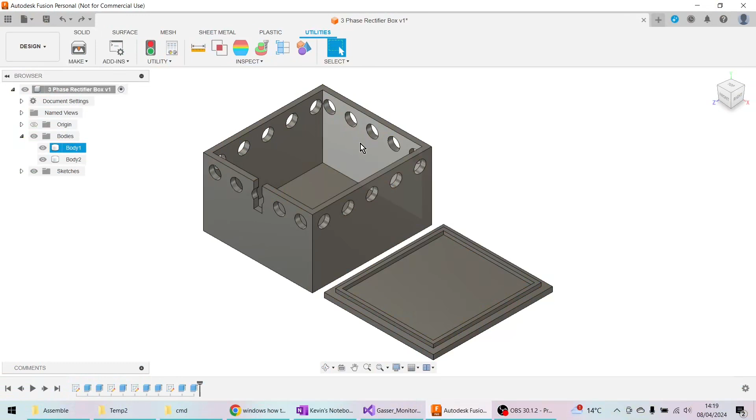Okay, so we start with these two bodies here. They're two separate bodies - we've got the main body and the lid for the box.

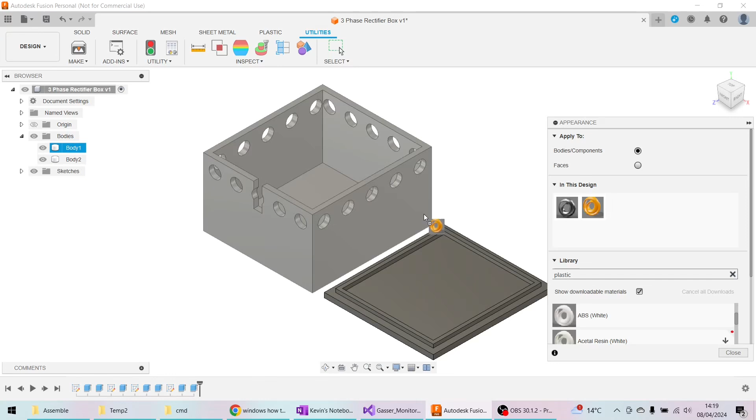So what we need to do is, first of all, let's just colour them in orange for a learning curve. I'm going to press A for appearance and search for orange, my favourite colour. We haven't got an orange, so we're going to go plastic. Now I'm just going to choose white, and then double click this and turn it into a nice burnt orange like this. Done. And I can drag that to that and drag that to that. So that's a nice looking orange.

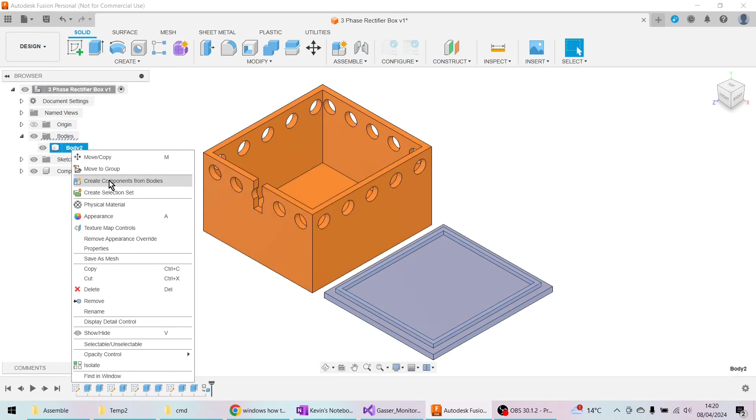I like that. So let's now assemble this to this. I'm going to go back to solids up here and go assemble - no, I'm not, I've got the two bodies. I need to do this bit first. Body 1, create components from bodies. Body 2, exactly the same. Right click, create components from bodies. And now I've got two components.

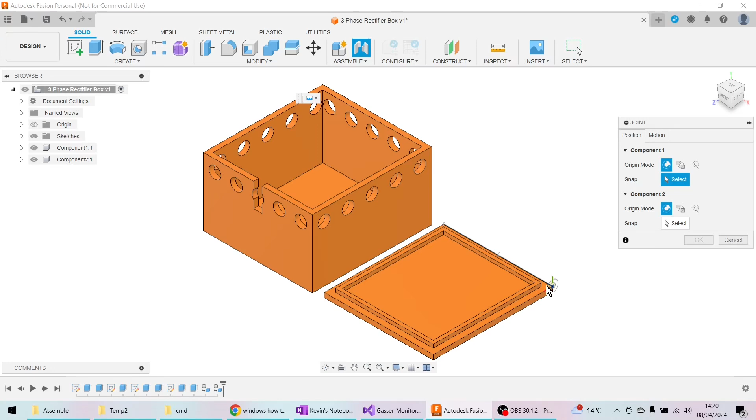Components can be assembled like this, so I can click on this assemble joint. We can make a rigid joint - there are several different types but we're going to do a rigid. And I'm going to select the part I want to move to the other part. So I want to put this one on top of that one, and I figure that if I pick up this corner here and drop it on top of that corner there, then that will be good.

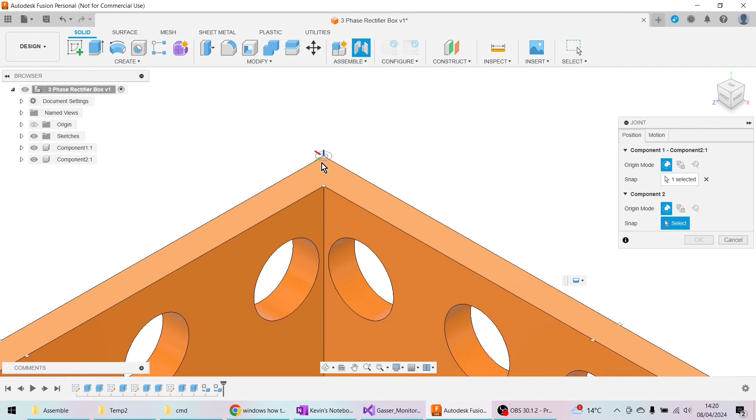So we're going to zoom in and I'm going to make sure I get the corner. Look how this bit's highlighting here - I'm on that edge, not this edge or there, I'm on that edge there. Pick that up, and I want it to go to this edge here. Now, slightly misaligned, so I'm going to rotate this around 180 degrees. And we're on. Click OK.

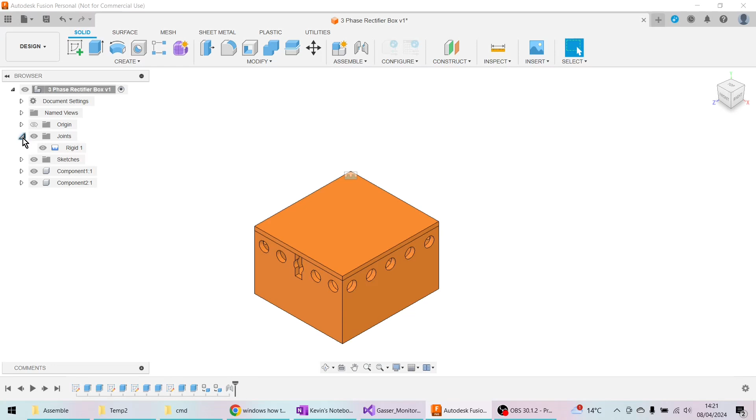We've now got a joints up here, and I can turn this off if I don't want to see my joints, or turn all of them off with the master hierarchy. Okay, so what I now need to do is see if that lip inside there has got enough clearance for 3D printing.

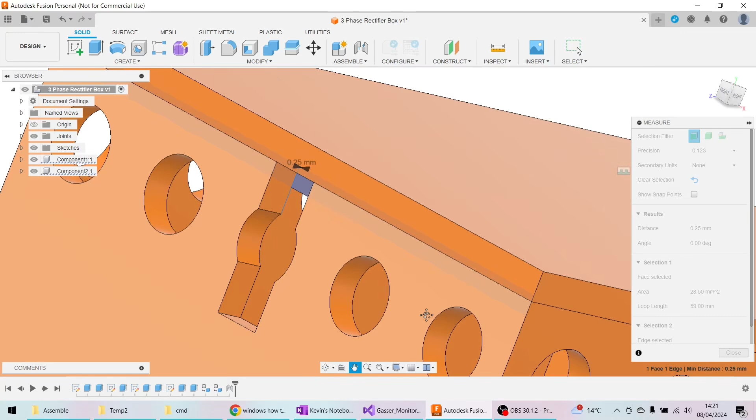So luckily in this case I've got a nice gap here, so I could go inspect, highlight this area and that line there, and I can see I've got a nice 0.25mm gap in there. But if I didn't have that, it could be an issue.

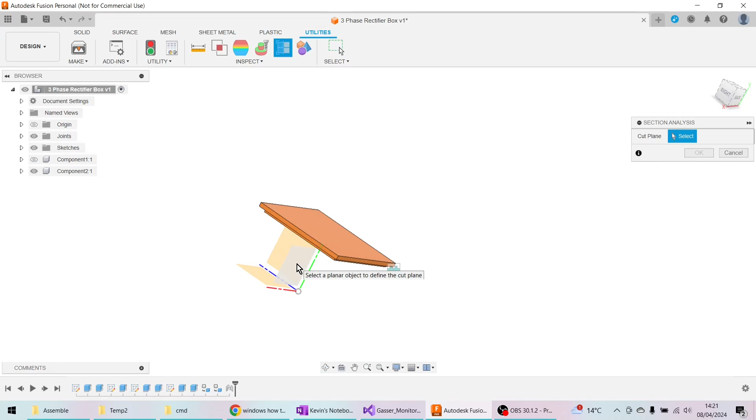So what I would do is go to utilities, inspection, section analysis, and I need to click that orientation. So if I just turn that component off so I can get to it, I want to see this into orientation like that. Click OK, put that component back on. I can now zoom in and have a good look at what that gap is there.

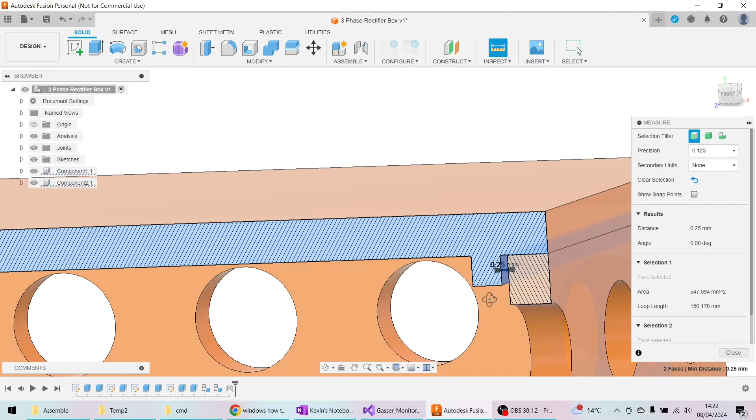And I can still use my inspection tool if I want - back to solid, inspection, what's the gap between that wall and that wall? 0.25mm, okay that's great. I could go back to utilities, section analysis, and click this way, and do the same again, so I can have a nice look inside. And then I can go back like this.

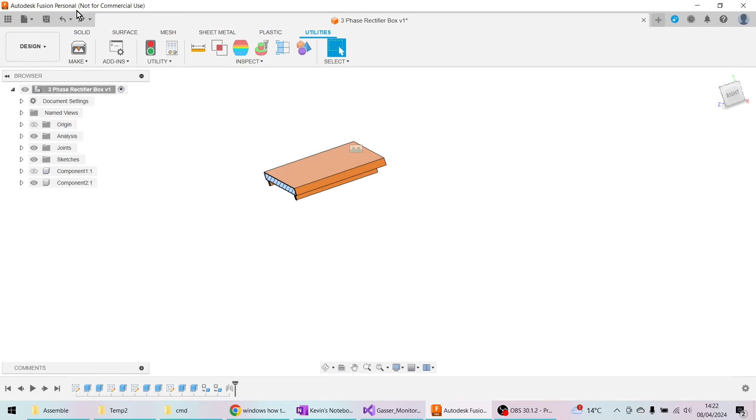So that is how to join different parts together and check that they fit nicely for when you finish 3D printing them, so you know they're all going to sit together nice.

Well, I hope that helped somebody. Maybe it's inspired you to get into 3D printing and using Fusion360. See how easy it is to create what you need to be printed.